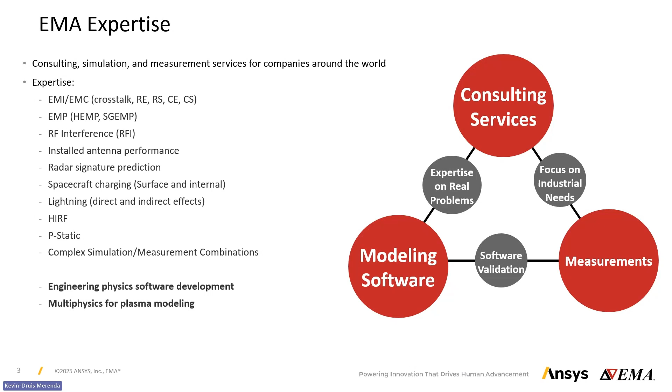We are also a consulting company. We serve as EMI, EMC expert for many industries: aerospace, military, automotive, rail, energy, consumer electronics, plasma, semiconductor manufacturing. We do a lot of first of a kind scenarios. We engage with customers through the use of the software and through the development of very specific problems and workflows with the EMA softwares.

And we also have the ability to do various projects that require clearance. We have a DCSA facility clearance, and we have several cleared employees. So if your projects are of that type where you need some cleared people to work on them, to introduce the software to you, we can also do that as well.

But we are most, and more than ever, a technology partner with Ansys. We develop EMC Plus and Charge Plus, and we work with Ansys to sell and support the solution worldwide. We've been awarded the Ansys Technology Partner multiple times in 2022 and 2024. Our solutions are Ansys EMC Plus and Ansys Charge Plus. Both have a lot of updates for 2025 R1.

And if you haven't been introduced to the tools, here they are. The two tools are in the Ansys Discovery user interface. We have our add-ins that you can see at the top: EMA 3D, M-Harness, and Charge and Power Balance are the tabs that we have to be able to set up the simulation, mesh your model, and visualize the results.

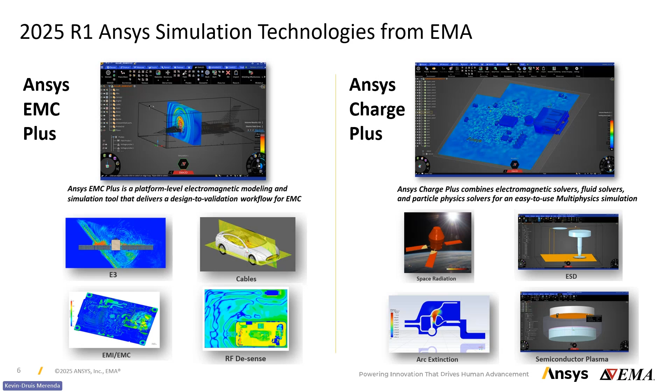This cycle, 2025 R1, we were very focused on responding to feedback from application engineers and customers around the world. One of the things that changed last year was a lot of testing from the application engineering team at Ansys, which allowed us to highlight the key necessary improvements we had to make to the solution.

We've improved PCB import speeds and reliability by a factor of 10, even more. This is very important for integrating PCB simulation inside your enclosure, both for EMI/EMC concerns and for ESD applications.

We've improved post-processing and 3D visualization—I'll show a little bit more about that. We have faster opening of meshed EMC Plus models. This capability is coupled with our new ability to save the mesh in an external file from the Disco file, so you can ship it out or not with your solution.

We have a cohesive materials library across the electromagnetic suite, which means HFSS integration with Granta and things like that—a lot of things we'll talk about in more detail in a little bit. We have more API coverage than ever before, especially for EMC Plus. This is very powerful for dealing with complex models and making more automatic workflows, but also for improving internal integration testing for the tool.

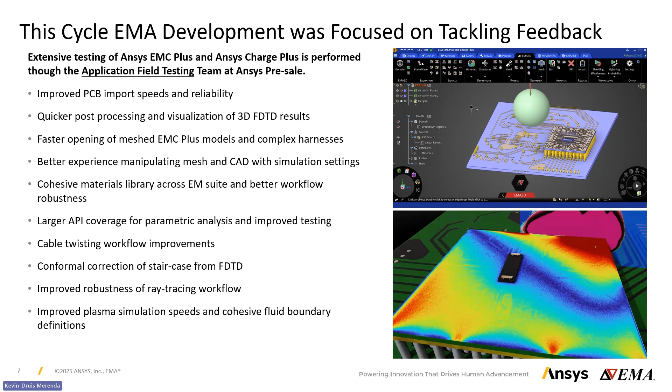Here are some of the headlines, new functions. We're trying to improve a lot on our performance, as you can see. So in terms of new features, it seems like we haven't slowed down in terms of integrating new features across both tools.

The ones I will highlight today in EMC Plus are integration with the Discovery material rendering capabilities, and the subcell multi-thin layer material. So you can now create a thin material stack-up in your FDTD simulation—it's going to be a subcell algorithm.

Improved user experience for larger models and enhanced 3D visualization performance, as well as meshing visualization. And then the clip plane for voxel mesh inspection.

I think we have one of the only tools on the market that allows us to probe the mesh in 3D with such amazing capabilities as a clip plane, and the ability to select meshed bodies and explore a meshed simulation specifically, as you can see on the bottom left here in this enclosure with the PCB, being able to look in detail at how the mesh is connected.

A lot of tools are available within the tool to make sure the mesh is the best it can be. We've introduced this conformal boundary approximation.

This is a beta feature, and I'll talk about this in a little bit more as well, what that means. But this allows us to remove the enhancements of the fields that could be created from the staircasing, this cubic grid. With the corners of the Yee grid, you may have some field enhancements that you don't want for some applications. This allows us to remove that.

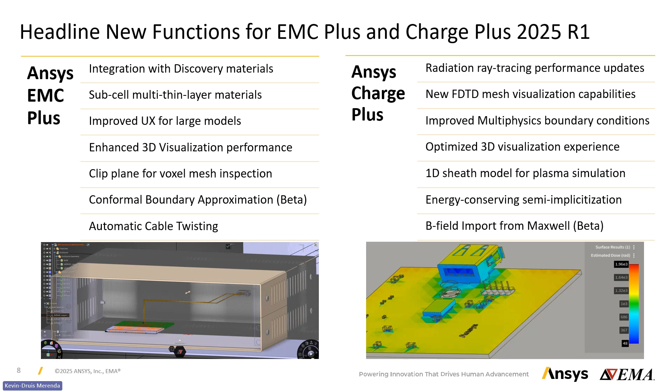I'm going to dig right away into our Ansys EMC Plus highlight features. The conformal boundary approximation is a surface approximation that we apply to one of our objects in the CAD. It allows us to approximate curved surfaces much better than we would with the cubic mesh. Even with a very fine resolution on the sphere on the right, you're going to have a staircasing effect. This could enhance the fields, especially for arcing problems or air breakdown problems, but also for RF electromagnetic reflections in the system. So if you want to solve radome problems and effects at that level, it's critical to handle the staircasing properly.

In case there are some misalignments, as you can see here, you can apply the tool. It's one of our beta features. You select the tool and select the surface on which you want the approximation to happen, and we do that automatically in the solver. On the right, you see a sphere, and on the bottom right, two spheres where we're creating a spark between them. You can see field fluctuation and enhancement between the two spheres due to the staircasing, which can actually change ESD problems and the breakdown voltage, if that's what you're concerned with.

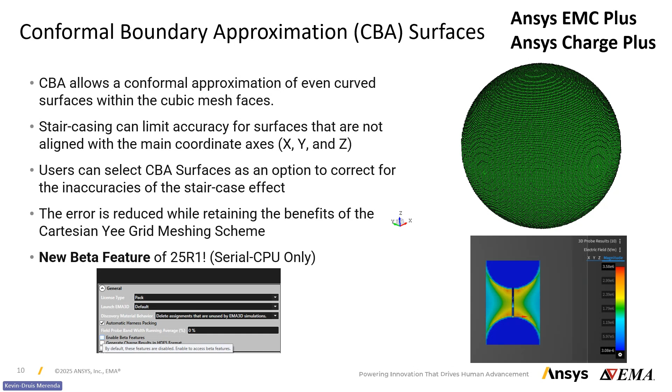So it is a beta feature. What does that mean? In the EMA tool settings, you can select enable beta features, and it will show you some of the new buttons we have in there. Beta features are something to be careful with—they are not fully implemented inside the solver. In this case, this feature would be serial CPU only, but it's there for you to try and give us feedback. This cycle, in 25R2, we're making it available in parallelization and in GPU as well. This is a process we want to start implementing when we have new capabilities critical for a lot of users, so we can bring them to you as soon as possible. But it comes with the caveat that there may be some limitations. Let us know and we'll walk you through them.

The cable automatic twisting: you can imagine that the twisting inside a cable will be very important. How many twists your twisted pairs or twisted triplets go through along the length of the cable will change any coupling of electromagnetics to the system and change the current and voltage solutions. Also, if you have various modes you're exploring in terms of coupling, that twisting is going to be key.

The new workflow is now in the solver. The user interface doesn't change—it's the same as before. You define the number of twists, and that information is passed automatically to the solver. What we do is solve for the capacitance and inductance matrix at each Yee grid instead of just at the end and beginning of the wire. This allows us to solve for the changes in capacitance and inductance along the whole length of the system. This is going to be a stepping stone for a lot of different capabilities in the future, but for now, this was key to implementing this in a robust way.

We've also introduced a thin layer capability. This was in conjunction with the conformal boundary approximation that we talked about. This is key to be able to solve radome applications and antenna systems with higher capabilities than we've had in the past. So in this case, if you want to model a stack up with very thin layers, where maybe you have some changes in thickness, permittivity, and conductivity that you want to capture on how the fields are being affected, both for reflection but also transmission.

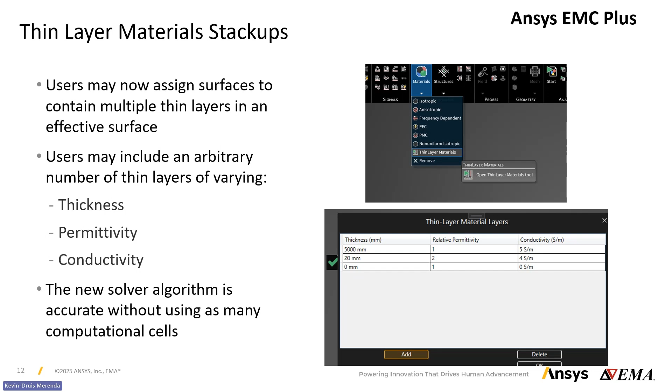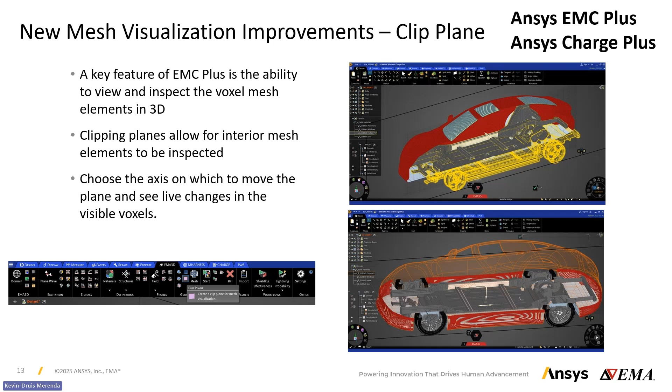You can access this from the EMA 3D ribbon next to the mesh variable grid or next to the mesh button with the purple clip plane tool. And you can click and drag the plane throughout the axis that you've selected. This allows you to really look at what's happening inside your system.

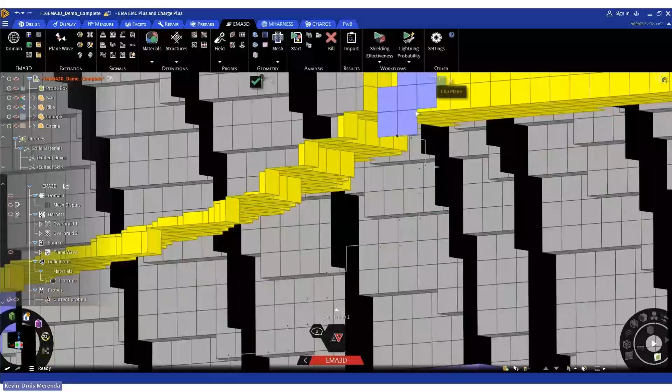Here's an example on our F16 demo. We are looking at the one side that isn't clipped, and then we are now looking at what's happening inside the system. And you can look at the cables where they're being propagated through the system. This allows you to look at the details of any connectivity issues that you may have in your mesh and give you a lot of exploration on how to diagnose any connectivity problems.

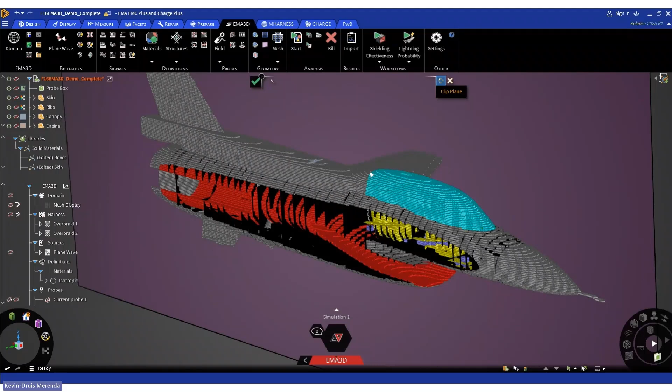And you can, as you can see, move and drag the mesh throughout the system to explore various parts. You can look at where your probes are inside the mesh, if they're well connected. You can look at your cable routing, look at the various connectivity between bodies and faces. As you can see here, we can make sure that the approach angle of the cable to the module is working properly and that there are no conflict issues in the system.

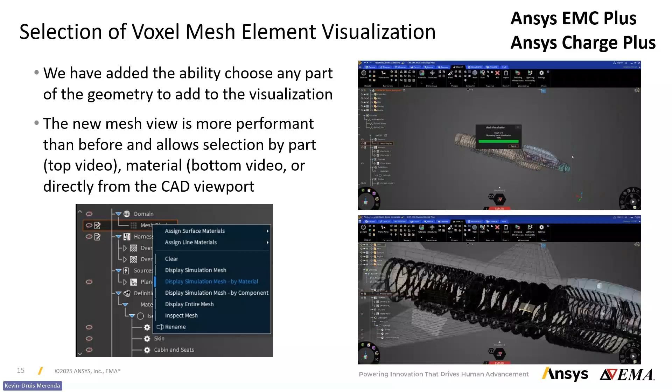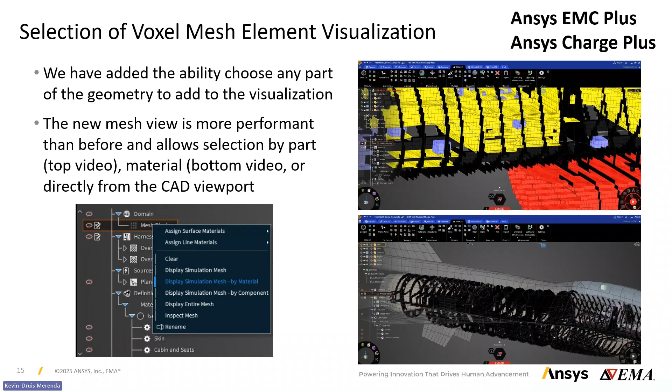We've also added the ability to visualize the mesh and select the mesh elements you want to see based on the structure that you want to highlight at the top or based on the material that you want to see. So on the top here, we selected a subset of the CAD, and we can highlight the geometry based on the CAD that we've selected. So we've removed the whole fuselage of the plane, and we can now see all the different components inside the system. Again, very powerful to be able to visualize and diagnose mesh issues, but also make sure that you have what you expect in the system.

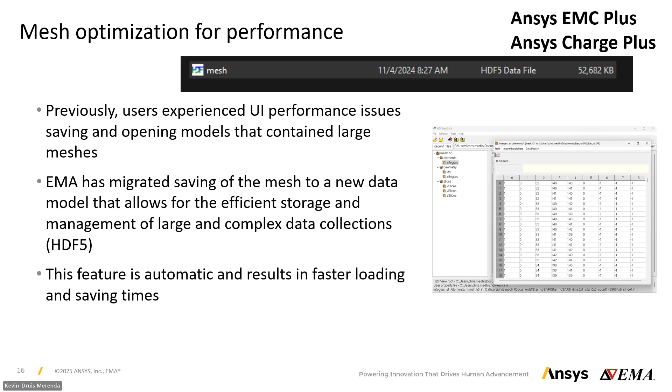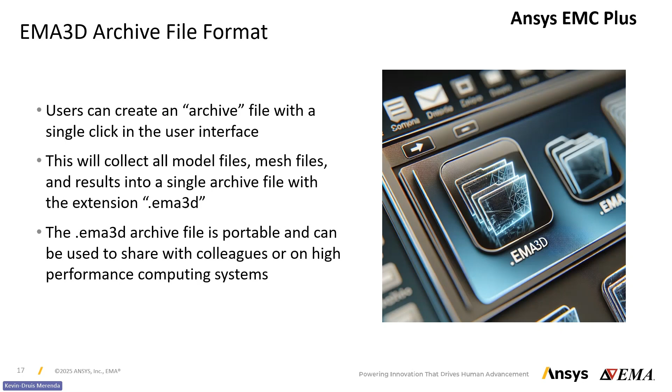You have the ability to archive results and the mesh file into a .ema3d object that you can then ship out to your colleagues, or that you can share with us very efficiently if you want to share results. This is one of the archive options that you can find in the settings tab. If you double click on an EMA 3D archive file, we will automatically open it with the EMA 3D tools.

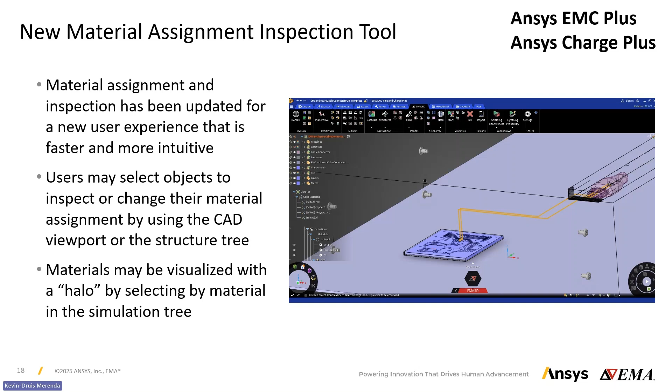In the future, we'll be able to improve this and show you more than just material assignments, maybe also boundary conditions, or even probes and harnesses and sources, things like that. But this is already very amazing for our users to make sure that they have the materials they want in the right location.

One of the other things that we've improved was the integration with Discovery materials. This is key for many reasons. One of them is Discovery is doing a lot to integrate with other tools across the Ansys suite. So if you're importing geometry with material assigned from other tools, Discovery will keep that material assignment. And this allows us to leverage that capability. The other capability is it allows us to visualize geometry with material assigned much better.

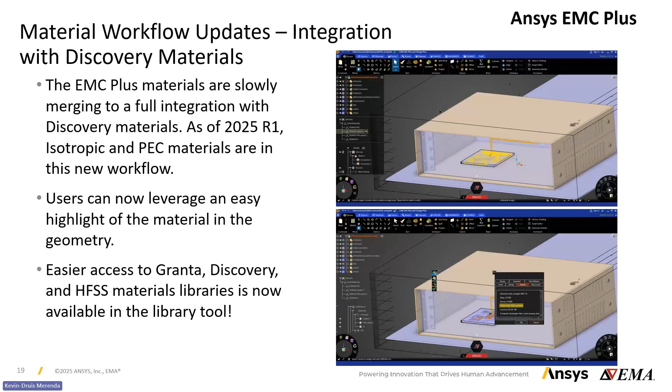This is also currently only implemented for isotropic and PEC materials. We will, in the future, move all materials from EMC Plus and Charge Plus over to this new rendering capability.

We've improved the 3D visualization probe. So in the tool, we have the ability to save 3D field data and air conductivity data in an efficient binary file format. Even though that file format is very efficient to save data, the rendering of the millions of elements from FDTD was difficult.

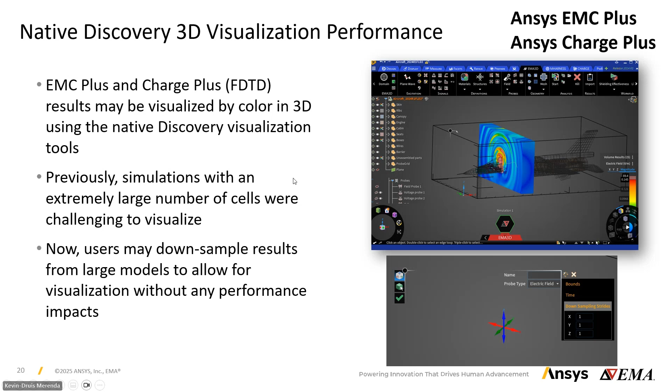We've applied our windowing capabilities to a lot more results than we could before. We have two electromagnetic solvers here that are time domain solvers, the FDTD, finite difference time domain, and the time domain finite element method. These two tools create time series results, and if you want to look in the frequency domain, you can use our windowing functions across the tool.

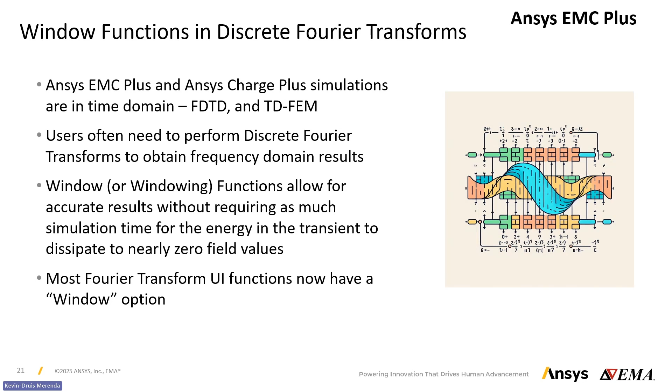If you right-click on your results node, you now have the ability to run those scripts on much more than you could in the past. So this is also very critical to make sure that you get the proper Fourier transforms on your data.

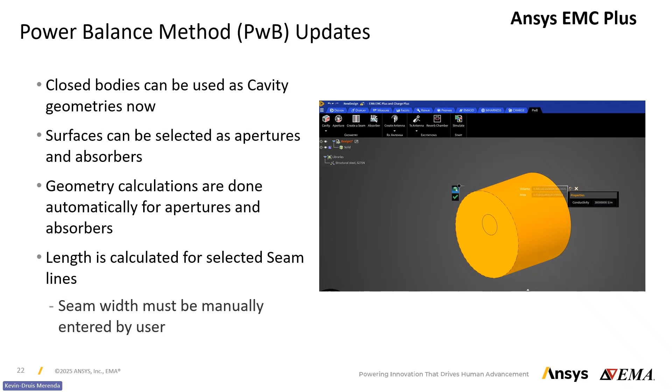There's also another tab in our tool, EMA3D Harness, Charge, and Power Balance. The power balance capabilities have been updated, where you can choose bodies for cavities now instead of simple geometries. You can also select surfaces for apertures and absorbers. This helps you really take your power balance analysis to the next level.

We have new APIs, and we've also improved the software testing at each release. So you can see some updates on the APIs here. The key is that we have most of the UI functions for EMC Plus covered by APIs. The next step that we're working on that you'll see later in 25R2 is the ability to record those APIs through the discovery script recording.

For now, all our capabilities in our API documentation are available in the user manual, and it's very well covered with tutorials and examples. So we're very excited to show you this capability to make your analyses and workflows more automatic. In terms of testing, we have testing of the tool at different levels. This is just to show you that we're working very hard on performance and reliability of the software, in addition to all the new features we're sharing.

We have 90% of all the new code covered by unit tests. We have physics solver regression tests that we've been doing for years. And we also now, as of this month, have integration testing of the core UI plus solver that we implemented in 25R1. That's also very powerful for testing the product to levels that are going to take its reliability to the next level. So we're very excited to provide a much better user experience than we've ever had before.

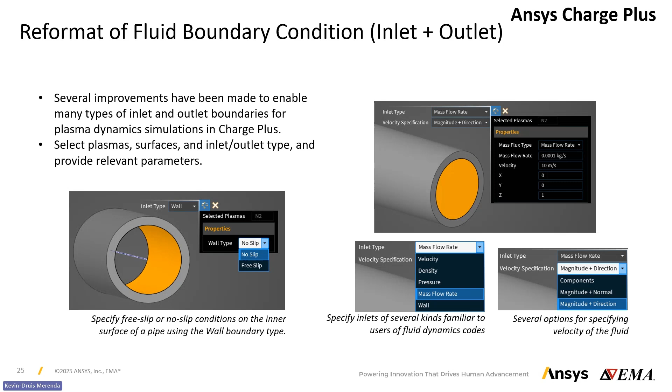So instead of creating a PIC density boundary condition, we now have split the electromagnetic boundary condition, the inlets and the outlets. And you can see the inlets, there's a lot of overlap with how a CFD solution like Fluent would define inlets as mass flow rates, as velocity, density, pressure, or wall boundary conditions. We have no slip, free slip boundary conditions. These are all terminologies that are critical to make sure that our engineers can solve the multiphysics problems in Charge Plus.

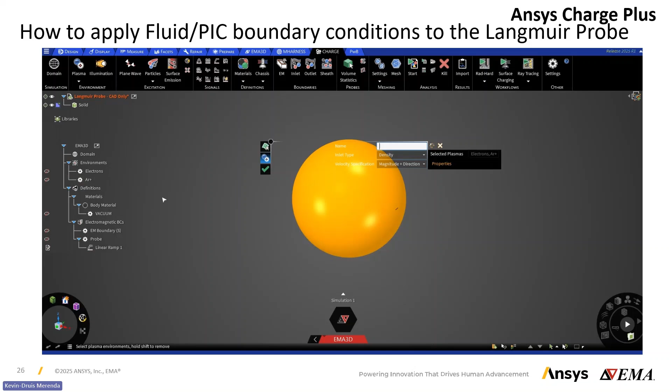This is an example of how it's done on our Langmuir probe demo. You can see the updates here in the boundaries section where we have electromagnetics inlets and outlets set up. We also have the sheath models. You select the surface, then you go ahead and select the plasma on which you want to apply that in the structure tree, like electrons and argons. And then you can expand the properties section.

There's a lot going on because this is applied to both a fluid solver, where typically densities are defined in kilograms per meter cube, but it's also applied to the PIC solver, the particle-in-cell solver. And so you can change the number density from true or false. This helps you change the units very easily depending on which you want to use for these analyses.

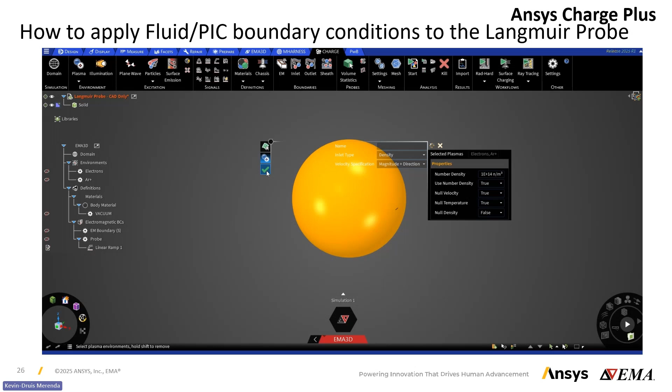When we talk about a PIC particle-in-cell simulation, we tend to work in number per meter cube versus kilograms per meter cube for the density of the fluid. This all depends on the densities and the type of simulations you're running. In this case, we're able to set a boundary condition at the edge of this simulation space to 1e14 for the densities of both the particles.

The other ability that we've added to the tool is the ability to select if you want the plasma to contribute to fields in one body or another body. So as you may be familiar with, charged particles have space charge, which will create electromagnetic fields in the system with respect to where the ground is present, for example, or with respect to your boundaries in your system. So an electron beam with respect to ground, based on its density, will have a certain potential that will be generated between the beam and the boundaries.

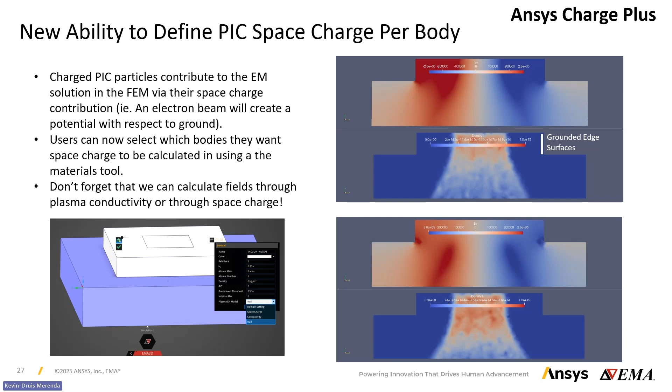Another capability that we've improved on is our meshing. And so here we're looking at leveraging the Discovery meshing instead of our legacy meshing. We know that the workflow requires us, for charge, to tell the mesh engine that we're sharing the topology, because the finite element method requires a conformal mesh at the interface between bodies.

So now we can define mesh groups per body, and we can leverage the prepare section of the tab, run the enclosure tool, for example, then the imprint interference model for the CAD, make sure that our geometry is properly ready. And then we use the share topology section to make sure that the mesh engine knows which bodies are touching one another and where we want the mesh to be conformal.

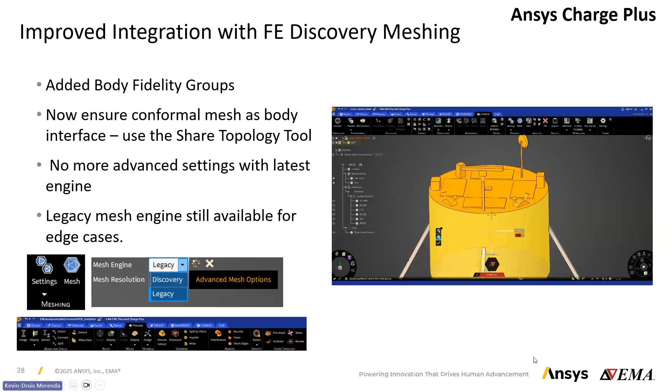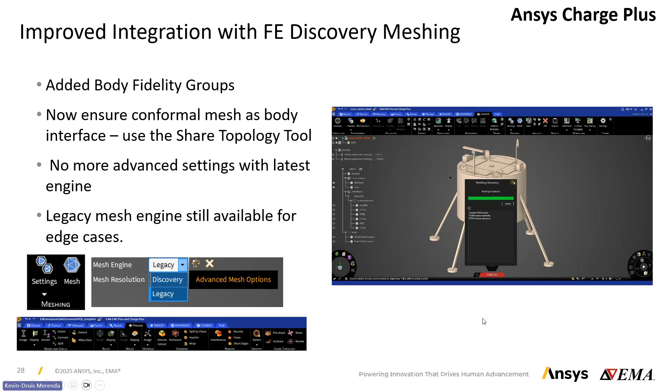And so here we're applying body mesh groups, in this case a 5mm mesh on the top features. And then we're applying another mesh group on the system. Now we can mesh. Our mesh is complete here with about 100,000 volume elements. When you run the Discovery mesh engine, the show mesh is going to be on the bottom right compared to the legacy mesh, which had the mesh display in the simulation tree.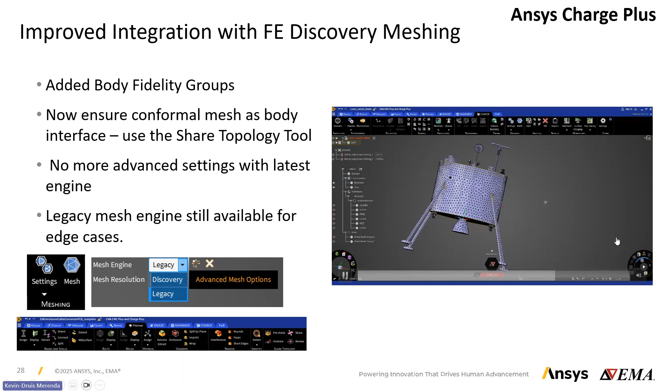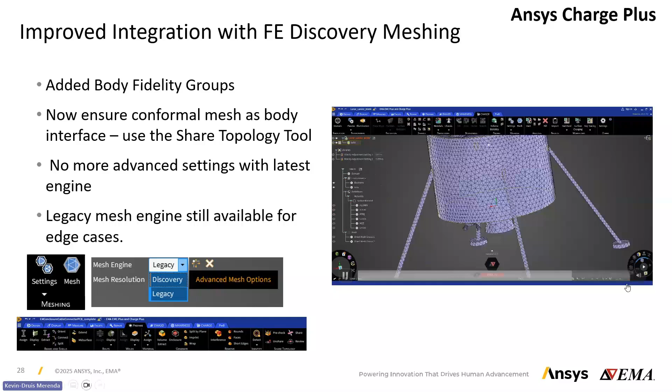So don't forget that if you don't see a mesh with this new workflow, it's because you want to look at it on the bottom right and click the mesh visualization tool. And now you can see all the mesh groups that we've applied of 5mm on the top, and a mesh that is ready to go for the simulation of surface charging at the surface of the moon.

We've improved the ray tracing capabilities for measuring ionizing dose. The tool has been very popular, and we've gotten a lot of feedback for its capabilities from 24R2, and we've built upon that. One of the things we've done is we've decoupled the solver from the user interface. This allows you to stop a simulation without having to kill Discovery, which was a little cumbersome. But this is also allowing us to give you updates of the executable much more quickly if we need to do that.

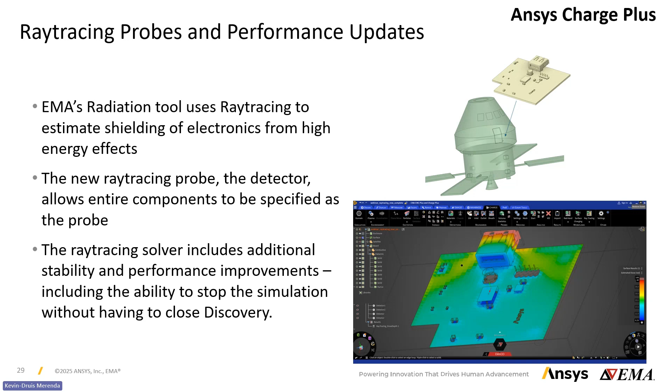In this case, this is a tool that we're very excited to have, and that helps us solve for the ionizing dose on PCBs and sensitive equipment inside very complex structures like your satellite or your enclosure. You can very easily add additional shielding on the surface of the PCB. And so this is a tool that's been very exciting for us.

One of the things we've added is an API to be able to create probes very quickly. A lot of these PCBs have a lot of components, and if you want to solve for the ionizing dose on each component quickly, you can use APIs to create the probes on each of the components. And here you can see that we selected some of the transistors and the IC on the system and assigned it specifically to the bodies that were in your CAD. So if you have an imported geometry of your 3D layout with all the components well labeled, you can easily loop through all the components in your set and assign a probe to it.

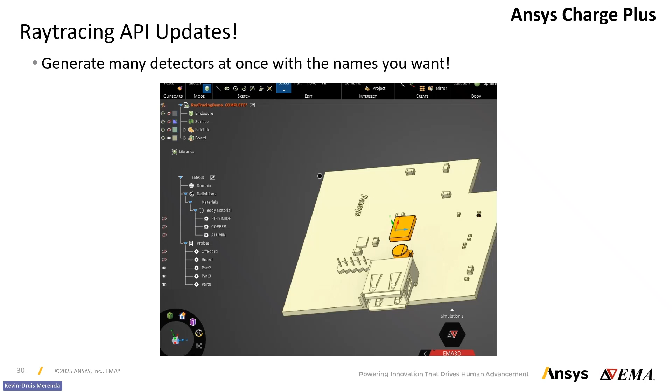Now onto the plasma simulations. For the PIC and the fluid charge, like RF plasma simulations, we have improved the ability to model the sheath. The plasma sheath is key to solve for the proper electric fields inside your system. If you don't have the ability to model how the plasma is screening the electromagnetic field that you're applying to the system, you're not going to get the right fields, which means you're not going to get the right energy and then not the right ionization densities, etc.

for the whole system. But the problem is that when you reach higher densities in plasma simulations, you're going to have a sheath that is much smaller than what is reasonable to mesh. And so in our case here, we've introduced subcell sheath algorithms. They're like 1D algorithms. We have an analytic sheath model that we use all the time for our problems.

And then we also have a kinematic sheath, which we call PIC-1D3V, which is a technique that allows us to share macro particles between the sheath and the bulk plasma, and also the surface. So we have a lot of tools in-house to be able to tackle these problems, and it really helps us with simulation time.

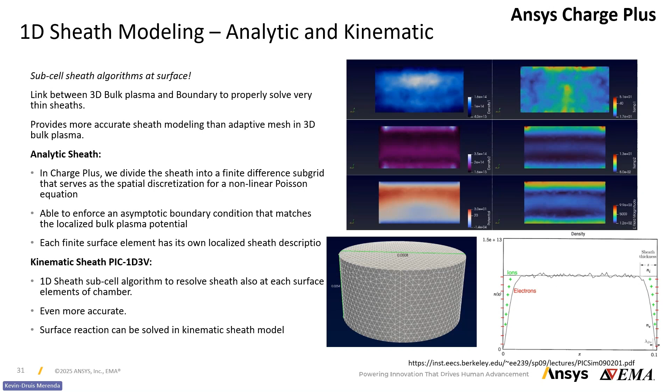I'm gonna take a 2-second pause here. I need to blow my...

Okay. So the other thing that we worked on is a very novel approach to resolve the issue with plasma simulations when the mesh is too coarse. The problem is called numerical heating, and it's caused when the Debye length is not resolved for the plasma. The Debye length is something that speaks to the interaction of the charged particles with one another.

And you can imagine that we're not creating a mesh that allows us to solve for any screening effect between an electron and an ion on a micro scale. So we have to be able to solve that problem on a macro scale. And this is where our ECSim capability is key. This is something that we have a lot of details on, but you can see on the left here, this is a cube with just a plasma that is initialized in the system.

And after a certain amount of time, you can see that we're looking at temperature. The temperature scale is exploding. We are actually diverging, and the plasma is just numerically unstable. But if we add the implicitization capability, as you can see on the right, after the same amount of time, we're actually able to keep the plasma densities and temperatures at the levels that we expect them to be.

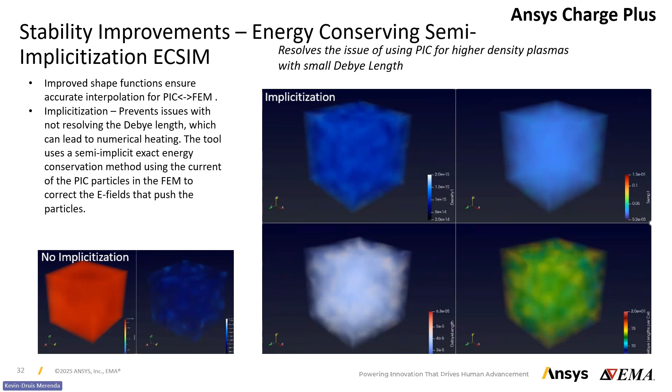Being able to solve this with the mesh element that we're using here, we don't have to resolve it with millions and millions of mesh elements, which makes those computations impossible. In this case, we are solving this problem maybe with a mesh size that is 100 times the Debye length, which allows us to get to the results that we need for all these plasma applications.

Most applicable here is this example, which is a 2D slice of the GEC reactor. This is one of our newest tutorials. This is the GEC chamber. In addition to using the techniques I just talked about, we have also been testing and successfully applied the ability to just create slices, as you can see here, of your 3D model and effectively solve this in 2D with our TET mesh and our existing solver.

This speeds up the simulations tremendously and allows us to get to steady state after hundreds of cycles in times that would be very difficult with a 3D simulation that has the mesh resolution needed to solve for all the physics that we're seeing here. In this simulation, we have an electrode at the top and an electrode at the bottom, and we have an RF pulse that is applied to the system.

The electrons and ions are responding very quickly at each cycle to the RF applied to the system. And you can see on the right the potentials that are generated by the plasma at the same time as the potentials applied onto the system. And this gives us a distribution of electrons and ions that we expect with a toroid shape in 3D. In this case, we have an off-center enhancement of the ionization.

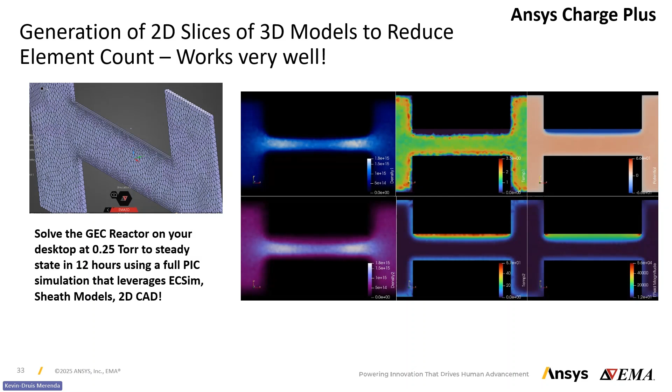And this is only doable by leveraging the analytical sheath models that we've applied, by leveraging the 2D mesh capability, and also the ECSim capability. So a lot is going on, and a lot of the workflow has improved for us to get very valuable information out of these simulations.

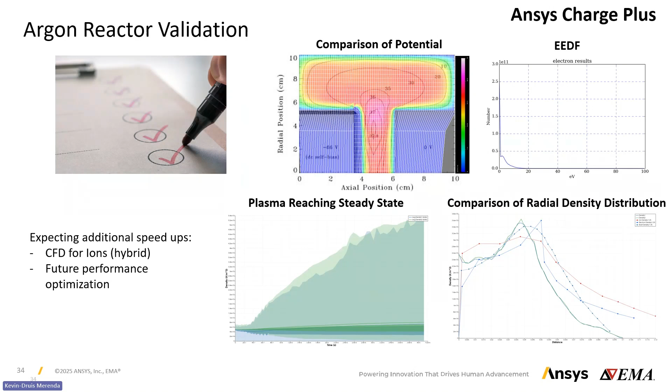We've done a lot of validation against literature for these argon reactor simulations. We can see the steady state of the ionization rates, but also the off-axis peaks. Our electron energy distribution functions are also the ones we expect, and we're only improving every day the performance of the solver at solving these problems.

One of the exciting capabilities as well is the integration with Maxwell. In our domain, in the advanced options, you can pick mapped background B field. There's a manual step where you export the simulation files, then take our nodal information of the mesh and pass it to Maxwell. Maxwell will do an interpolation on that point cloud, and then we can import that file into our tool as a background field for the simulation.

It's pretty important because the magnets in, for example, a magnetron sputtering application need to be solved accurately to get the field distribution in the system. Maxwell has all the tools needed to solve for the ferromagnetics. Here you can see the different poles of the magnets that are present, and the different capabilities we can do in Maxwell. This is part of our tutorial for how to set this up.

You have a choice in the magnet types, and Maxwell will go ahead and create the electromagnetic field distribution. When we change the scaling, we're able to see the magnetic fields in the system, and these fields are going to make it through your target. We can actually import those fields, as you can see on the bottom right, as a background field in our tool so that our electrons and ions will respond to those fields adequately.

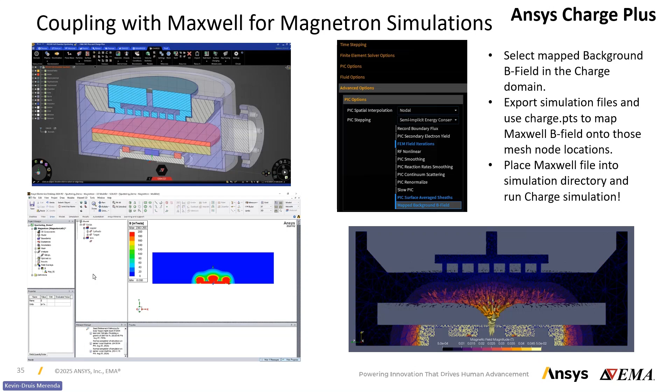The other thing we've really pushed on with Charge is the ability to model ESD in the FEM. We have ESD capabilities in the FDTD, but now we've also validated and elaborated on modeling ESD, because in the FEM we're not limited to the air and humidity that we have in the FDTD. We have the ability to model any gas for which you can source your collision cross-section data.

In this case, you can get electron collision cross-section data for air, which is what we did, and we're able to model and validate that against actual experiments very well. We're getting breakdowns that are within 2% of the expected results for breakdown voltage, and we're able to see here the 3D simulation of the discharge between a curved electrode and a flat electrode.

You don't have the staircasing effects. That's why we're able to get such high accuracy here, because of the mesh we're using, which is an unstructured TET mesh. We also have the ability to run this in 2D and 3D, just like we do for the GEC. We have a 7x speedup here between the 3D and the 2D model. Very useful if you want to get to resolutions quickly, but maybe a little cumbersome if you want to see the effects of magnetic fields and things like that on your sparks.

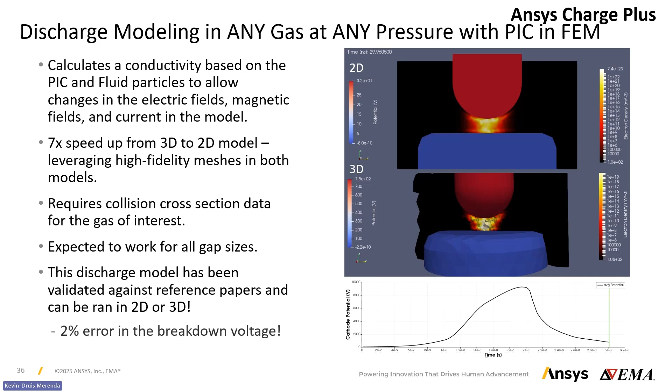Going 3D is going to be key. We expect this to work for many different gap sizes, even very small ones, as we have physics in the FEM that allows us to solve for thermionic emission of electrons and E-field generated electrons between conductors. So we're pretty excited to have this. Also, air pressures that are very small - maybe you're nearing vacuum environments. If you want to look at air discharges in that system, we can do that as well.

We have a lot of new tutorials in the tool that we've updated, especially for Charge for 25R1, based on all the new capabilities that I just introduced with the inlets and outlets and the new physics capabilities. These tutorials are available in the user manual. We have the tutorial for the 2D slice of the GEC reactor, an electron gun tutorial, and an updated electron ESD simulation as well in the FDTD on the sensitive IC that we have in the system. I invite you to go through some of these tutorials to learn about the fundamentals of our tools and the complex physics that is present.

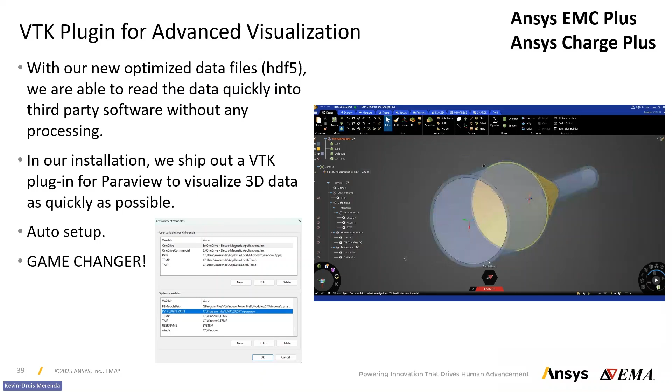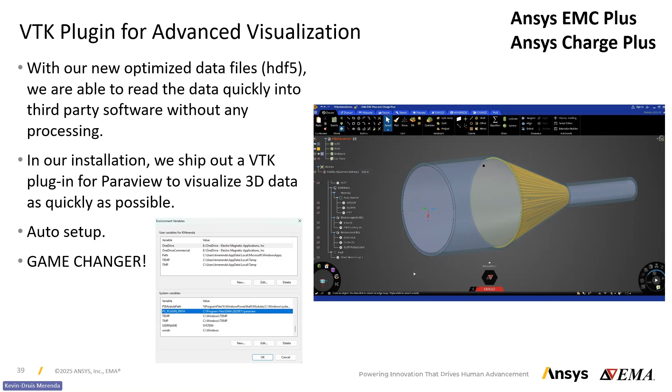The other very exciting capability is a development of what we call the VTK plugin, Visualization Toolkit plugin, which is something that is available in our ParaView, a third-party tool. Our data is now saved in an HDF5 file that we talked about for more optimized data processing. And this HDF5 file can be parsed directly by third-party tools that leverage VTK.

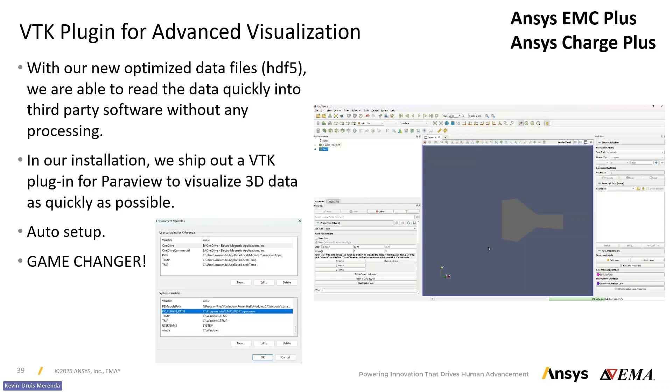In this case, I am navigating to an HDF5 file, .h5, and I can load different result types that I may have in the tool. I can cache the data into memory if I want to get even quicker in terms of animation and generating animations. This bypasses the processing of data into VTK files and VTU files, which was taking a long, long time. This is pretty game changer in terms of data visualization capabilities.

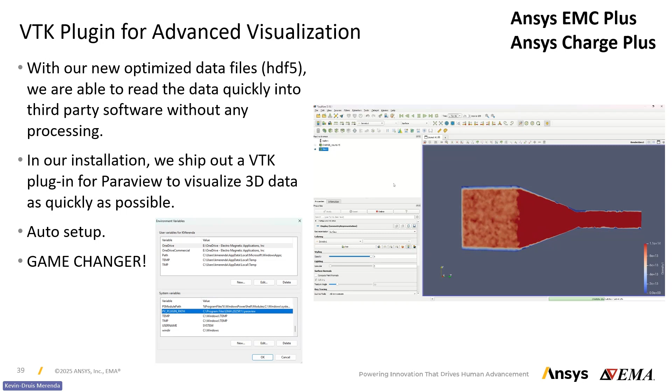This VTK plugin works for also EMC Plus for the FDTD, and it's actually a stepping stone for a lot of the animations that we're generating in NVIDIA Omniverse.

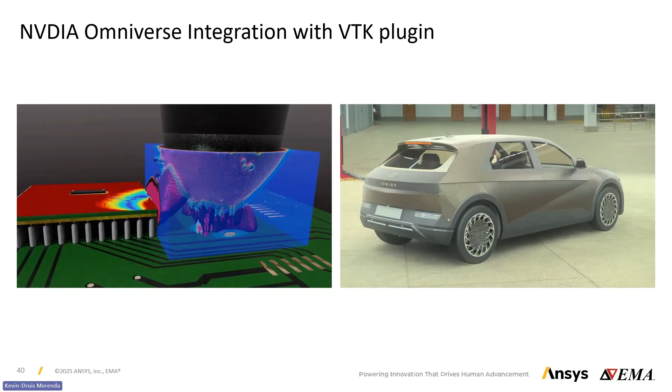So here on the left, we have a visualization of an ESD gun coming down and creating an air discharge onto the board and attaching to the IC at the same time and generating fields. You're able to create and really understand how your simulation results look like in real life, which is key to make sure that you get the proper interpretation of these results.

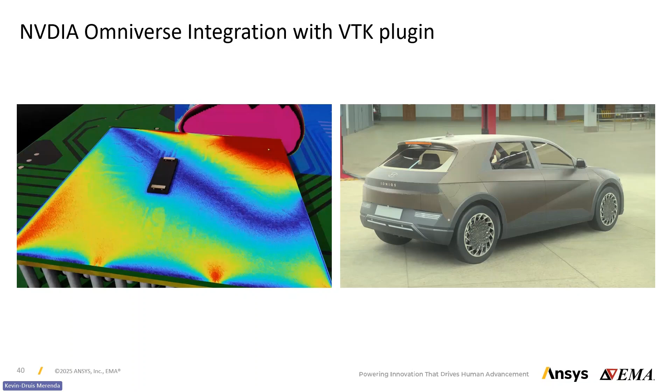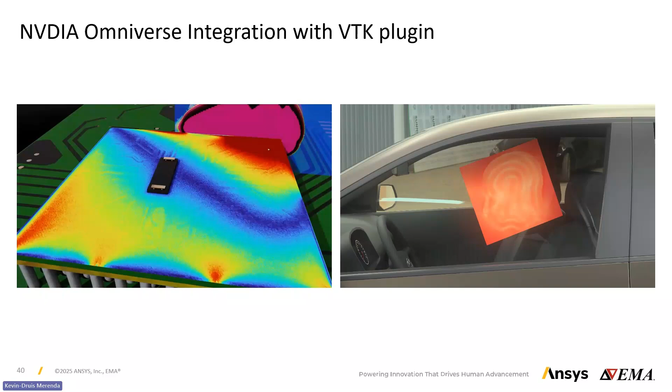I love to show you pretty animations, but I also really like to make sense of my simulation results in a real life scenario. These are just a couple examples that our team here at EMA, the EMA Connect team, has been able to put together to visualize how electromagnetic radiation couples to various aspects of, on the left, a board, and on the right, a human body.

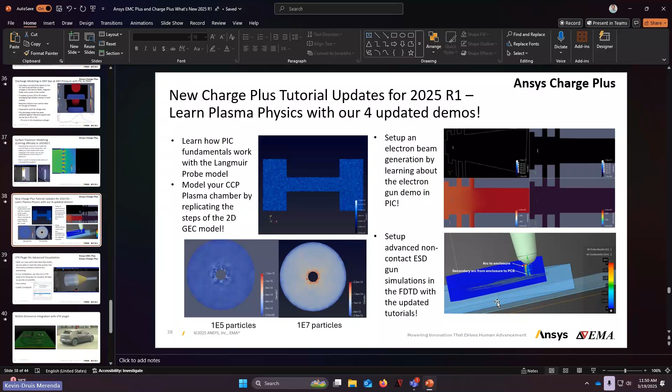Excellent. Next question is, what is a plasma sheath? That is something that I would invite you to look at some of our tutorials to get a better understanding of. The idea here, and you can see it on the bottom left, this is a Langmuir probe, which means that we have a metal sensor on the inside that is charged to maybe 15 volts. And then we have 0 volts on the outside, which is the reference plasma potential.

What happens is when you charge a system, you're going to have particles that are going to agglomerate or accumulate next to that electrode. So here the electrons are attracted to that 15 volts that we're setting up in the system. At this density, you can actually see it very well in 3D. This electron density will basically change the field distribution perceived at a certain distance away from the electrode.

So that is what a sheath looks like for the electron distribution. If you had ions in here, they would actually be pushed to the outside of the volume. And you are going to have a balance of ions and electrons during that sheath modeling, and it will play a very significant role on what the potential is as a function of, in this case, radial distance from the center.

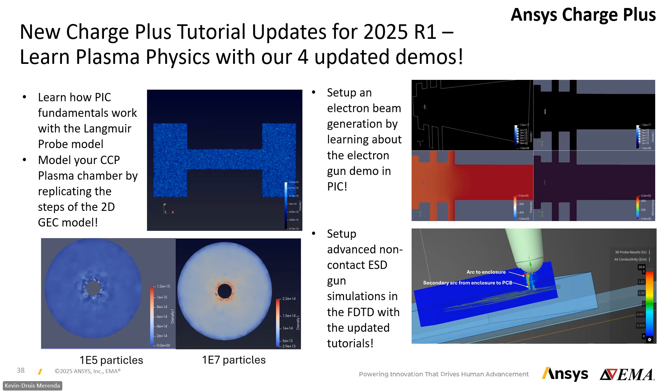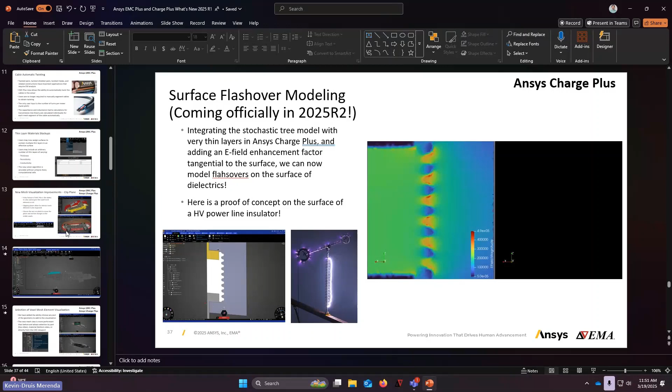Excellent. Next question is, the cable automatic twisting slide says the only input required is the twist rate. Does this assume that there is already CAD showing the cable with untwisted wires? Does the solver need to know the routing, gauge, strand count, etc.? That's a good point. Maybe the slide was a little misleading.

Yes, the solver needs to know the gauge. It needs to know the routing that we do through the CAD geometry, but we don't need the CAD of the actual harness itself. You can set that up using our mHarness solution, and that allows us to leverage the transmission line solver that we're using to solve for the cable solution.

Does the HFSS library have the proper parameters to perform a surface or internal charging analysis? The answer is that that library has the information necessary to solve for the electromagnetic fields properly, aka the conductivity and dielectric constant. But if you are trying to understand how plasma is interacting with that material, the HFSS library does not have the information necessary, which for internal charging is going to be the density and the Z value for that material, so the atomic number. And for surface charging it is going to be secondary electron yield parameters. A lot of these have to be sourced additionally to the variables that you can get from the HFSS simulation.